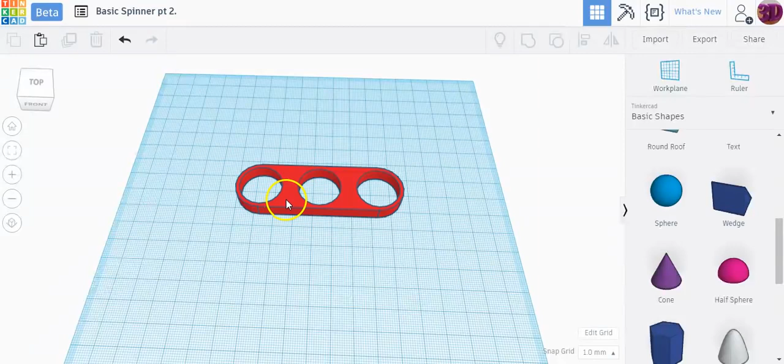Just a quick recap: these are 3 cylinders with 3 cylinder holes in them, and a box that was shrunk down to the same size and width as the spinners, all grouped together.

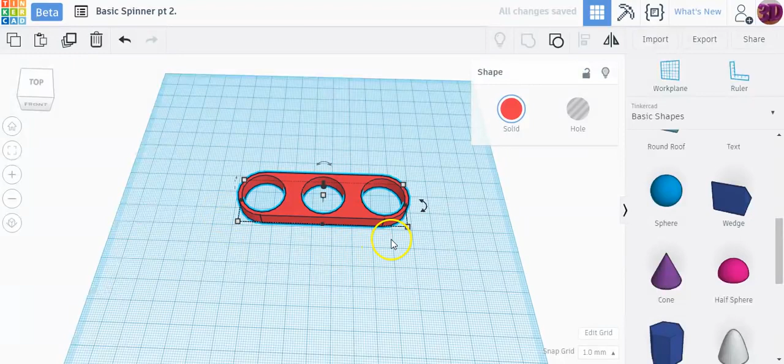Now, to make this into a tri-spinner, you have to do something kind of strange. I'm going to go to my basic shapes, drag an invisible box, and make it quite large.

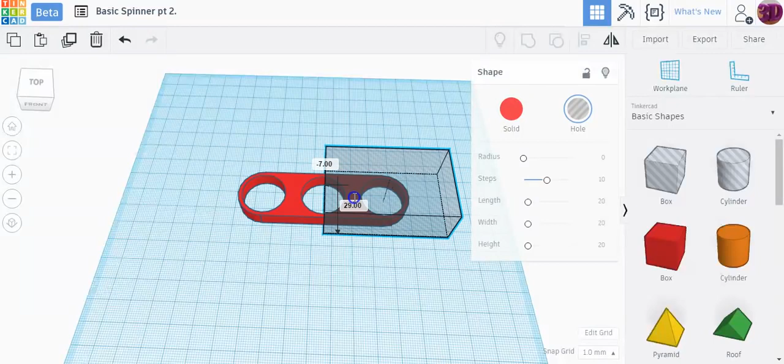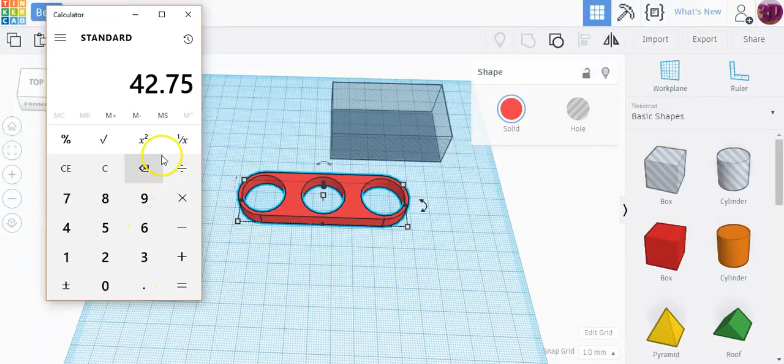Now I want to cut out half of this spinner. I could guess at where half is, or I can do it right the first time. What I do is look at exactly how wide my spinner is — it's 85.5. So if I take my calculator and divide that in half, I get 42.75.

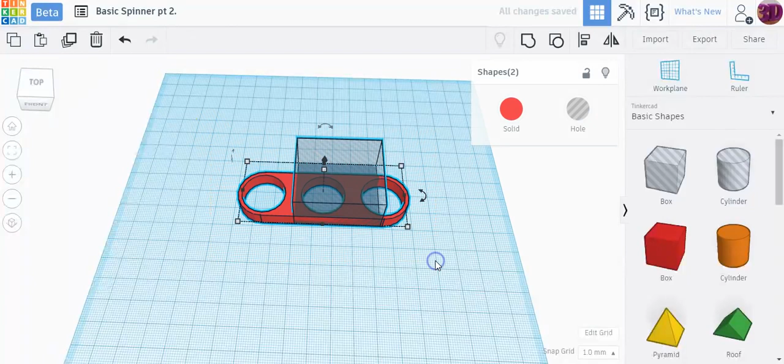That means my box here needs to be 42.75 in width. Now, to make sure I get exactly half of this, I can put my box anywhere on this shape, then select both shapes and use my trusty align tool.

I'm going to line it all the way to the right instead of centering everything, and I'll also center the middle as well, just to make sure the box covers exactly half of this shape.

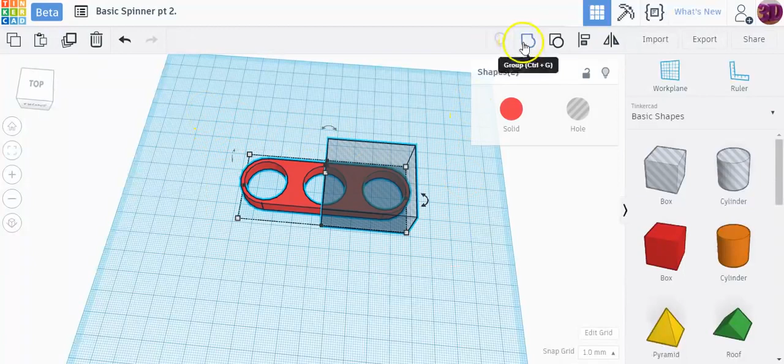Then I just select the entire shape and group it all together, and now I have half of a basic spinner. This might seem like a strange thing to do, but when we get to the final step, it actually makes things a lot easier for us in the long run.

Now what I can do is take this shape and use the flip tool. Actually, I'm going to duplicate it first, so there's another carbon copy directly on top of this.

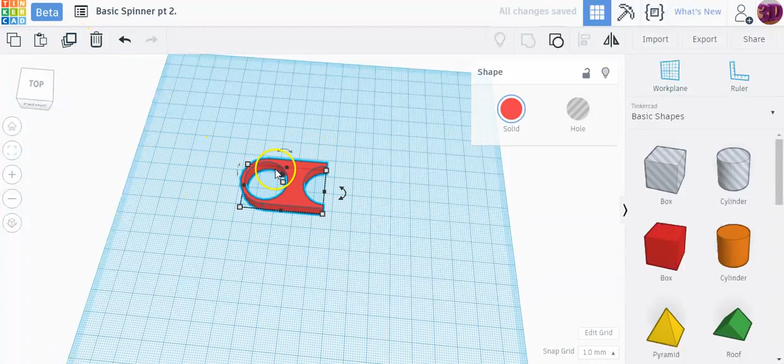Now I'm going to click on the flip tool and flip it exact opposite. Then I'll slide it — whoops, sorry, grabbed the wrong one — I'm going to slide these two so that they are touching.

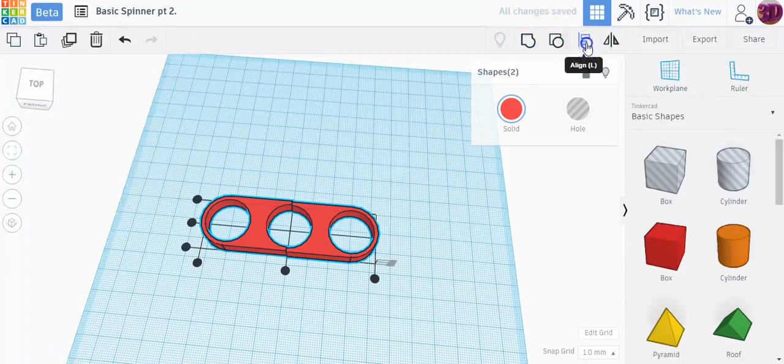I'll align them so that they're both perfectly centered on one another. That's important. Then I'll zoom in and make sure they're touching with no gaps. If you can see white in here, that means there's a gap.

So I click on one, use the keyboard, and slide it in. Now if you see that, it went too much inside, and that will make the center circle way too small to fit my ball bearing.

So I'm going to go to the snap grid and make it just 0.1 instead of 1 millimeter — 1/10 of a millimeter.

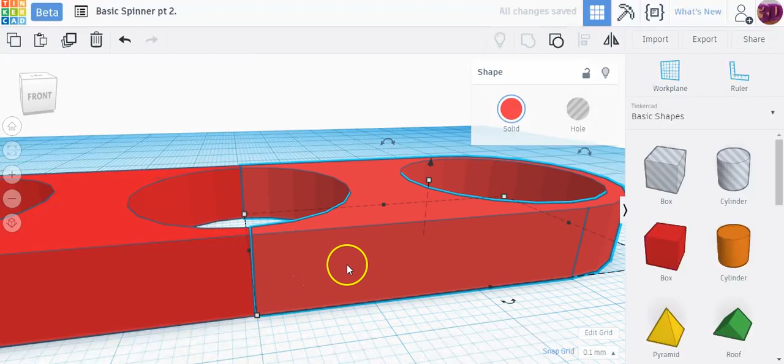So now I can click on this and just nudge it over, and that was pretty much all I needed — just one, almost, so close, nope, 2 nudges. That was it. Now I have my spinner.

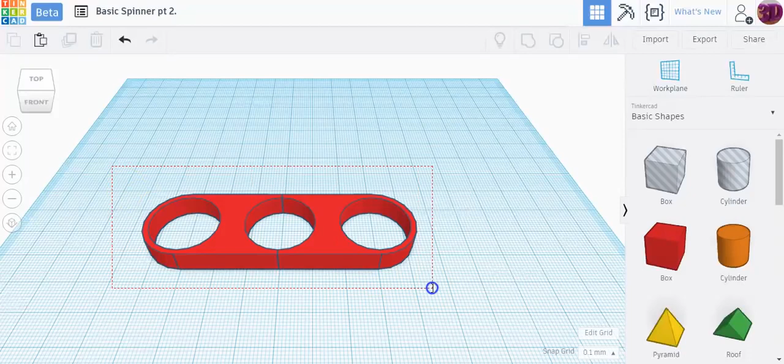I can click on my home button and zoom back out. This part just takes a little bit of time, but once you get it right the first time, you're good to go. Now I'm going to select everything and group it together, and now I have one solid shape again.

Now I know you're wondering why we did that, and again, I said you'll see it at the very end. It'll make our life a lot easier.

Now I'm going to click on this shape here and duplicate it. Now I want to rotate it. I could rotate this by clicking on these little loopy arrows on the side. If I put my cursor on the inside, I can rotate by 22.5 degrees each time, which is useful to get quick 90s, 180 degrees, things like that. If I grab the loopy things and go outside the circle, I can get very specific, going by 1 degree at a time.

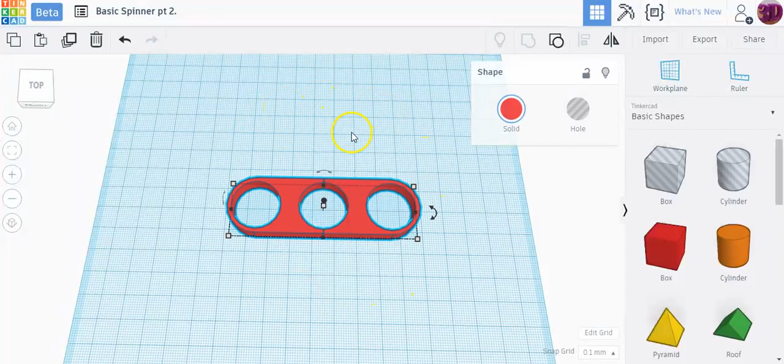So I want to duplicate this 3 times, because when I'm all done I'm going to have 6 circles on the outside, perfectly spaced apart. A circle is 360 degrees, and 360 divided by 6 is 60 degrees. So I'm going to grab my rotation tool and make this be exactly 60 degrees. Okay, and that was my first one.

Now I'm going to click on the duplicate button and watch what happens. It already predicted that if I did 60 degrees once, it's going to predict and do 60 degrees again, so now I don't have to do that again. Now if I want, boom, I'm done with another really cool spinner. I can make this with 6 outside and 1 in the middle, and that's a really cool spinner in and of itself, and I can stamp this done.

But that's not exactly what I was going for. I'm going for a trifold spinner. So in order to get a trifold spinner, I need to erase 3 of these 6.

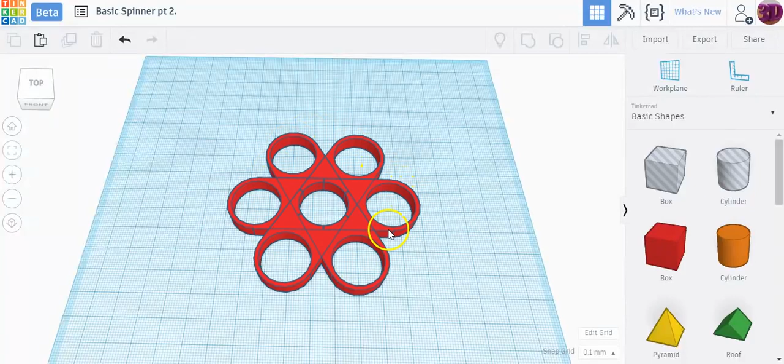So I'm going to click on my first initial shape right here and ungroup it, and this is where that creating a half comes in handy. I'm going to click on this half right here and press the delete key on my keyboard, and that disappears.

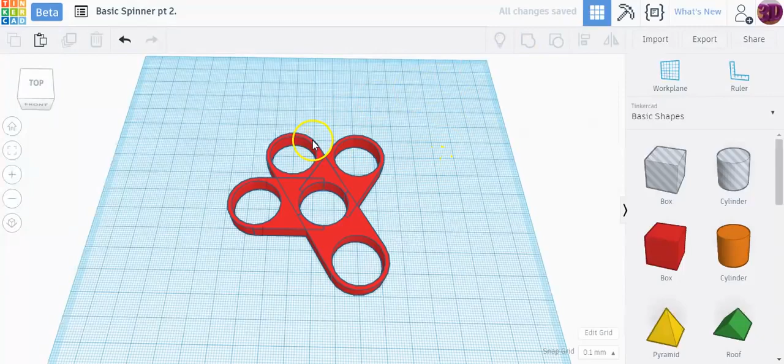Now I'm going to go to this one right here and ungroup it. I'm going to click on this piece and delete it, and then I'm going to click up on this one, ungroup it, click on this piece, and delete it. And there you go, now I have a perfectly spaced and balanced trifold spinner.

And again, I can stamp this done, but sometimes you like to add a little extra detail to make it interesting to look at. So I'm going to grab the invisible cylinder in here, and instead of 20 by 20, I'm going to make it 30 by 30.

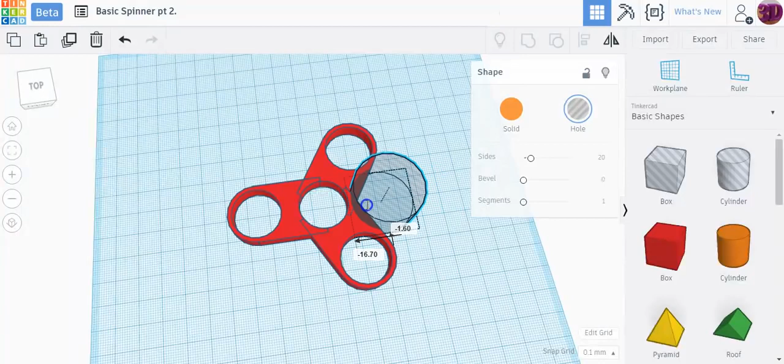And I'm going to take it and just nudge it into this side right here. This is a little challenging to center it perfectly, so a little bit of trial and error, and I can use my keyboard to bump it forward, backward, up, down, trying to get it as balanced as I can.

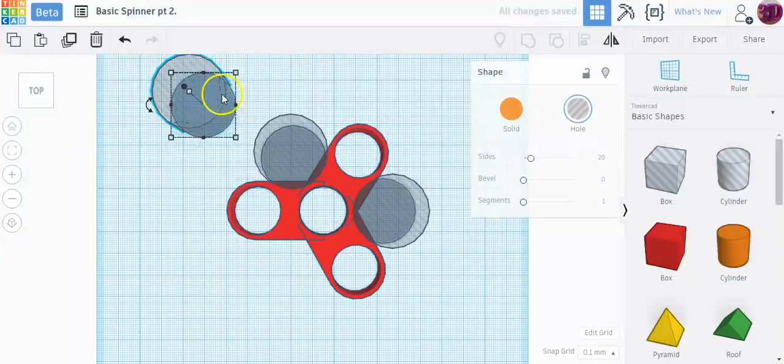So then I'm going to duplicate this and put one up here in the same kind of spot, just kind of notch out these little corners right here, and then duplicate and put it up here.

Okay, and if I think I did it correct, if I select everything and group this all together, now I have a pretty cool looking spinner with some notches cut out, making nice little finger grips to hold on to, and this is something that I can send to the printer.

And that's it. Now I've taken a basic spinner and made it way better. Let me make a tri-spinner. These things are not difficult to make, and thanks for watching the video.